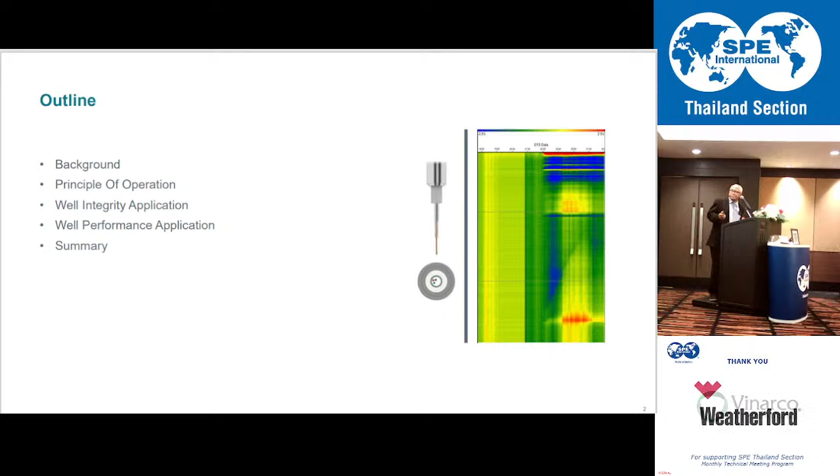When we look at where we work, we hope that we have this situation, but unfortunately not, because when we talk about oil and gas production, we never have the same as what we see at Niagara Falls. Why? Number one, the oil and gas is limited - the amount is limited and there is no recycle.

Number two, when we talk about oil and gas production, by nature it always declines. The third one, as you experience over time, the longer you have your field, the more difficult to produce, or the more expensive to produce at the same time. And the last one, the longer you operate your field, the more potential you encounter problems.

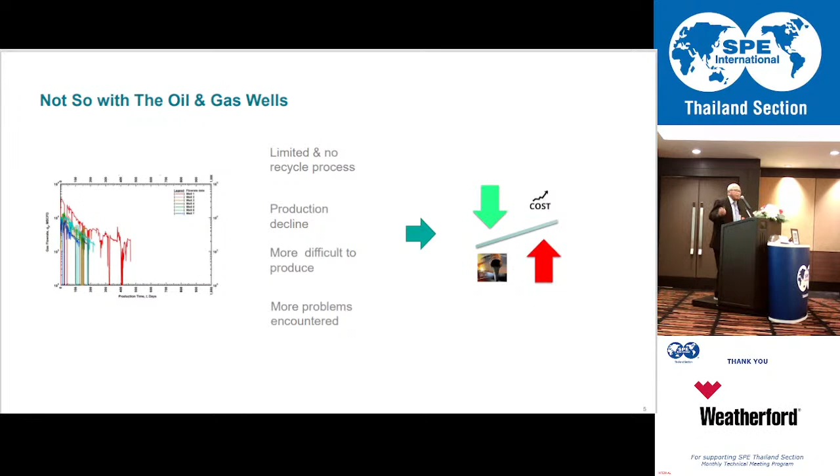But before talking about how the industry reacted, I would like to talk about where we are actually in the life of the well, from the beginning of exploration until when we abandon the well. Many SPE members - if I can divide it, we can divide the life of the well into two phases.

One is when we focus more on study and evaluation - I'm not sure with the audience here, but it looks like many of them are actually involved a lot on both sides. Whether you are focused on study and evaluation, or on the second phase of the life of the well, where we focus more on innovation and practical approaches to produce the well more efficiently.

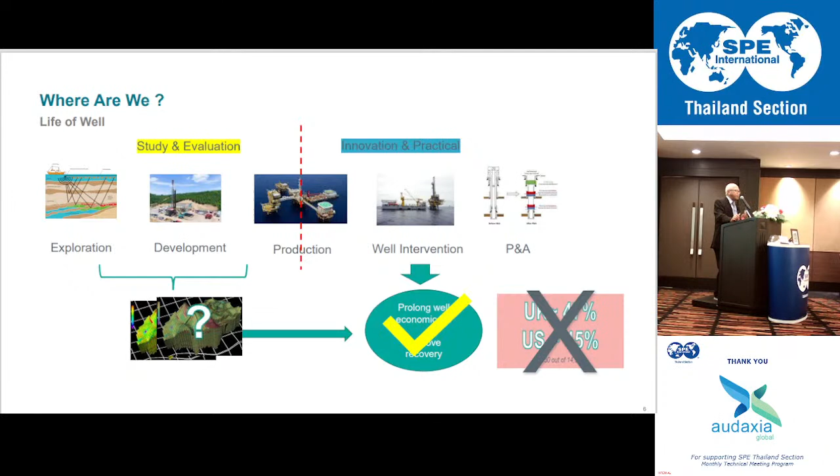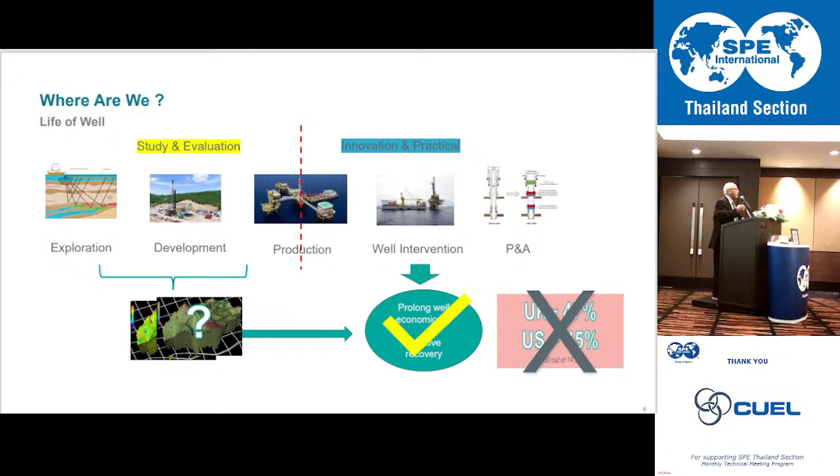From the study and evaluation, this is where the decision is made, whether from the exploration you have an economic enough reserve to develop, or you have to decide something different. And then when you decide to produce the wells, or when you do the characterization of the study and evaluation, the product is the reservoir characterization - it's like a blueprint for the rest of the life of your well, how you're going to produce, how much you're expecting to produce from your field, and so on.

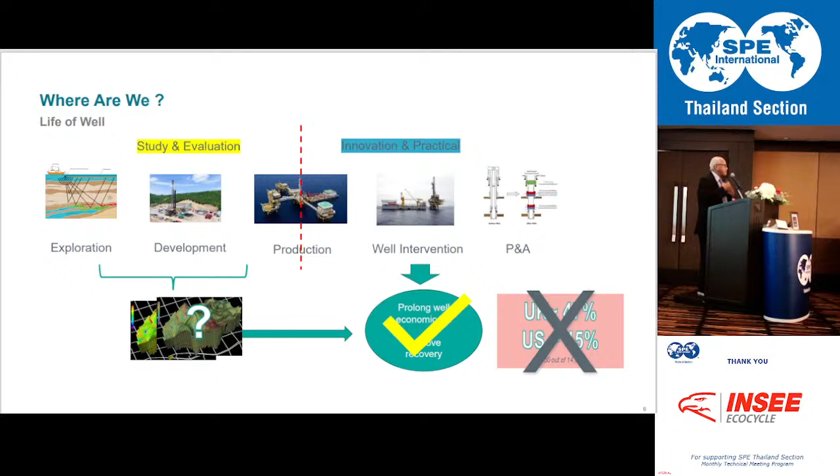After the production, what you have to focus on is to maintain or ensure that the well is still able to be produced economically. Number two, you try to get as much oil or gas recovered from your reservoir, which is to maximize your recovery factor.

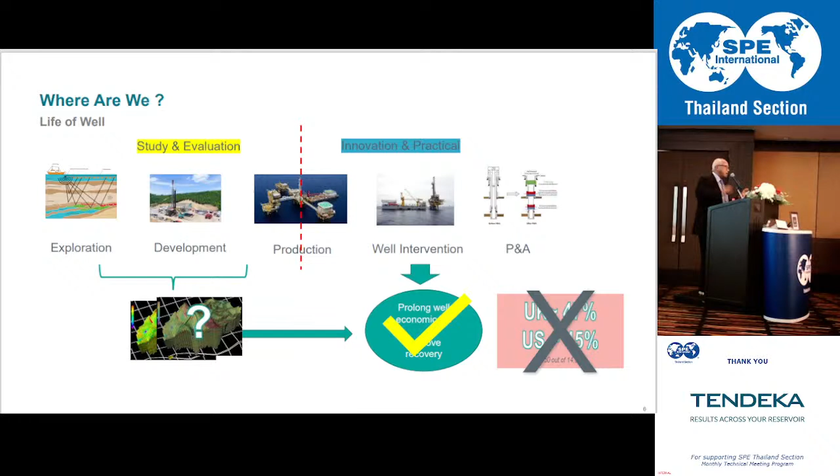What we need is, number one, your reservoir characterization has to be accurate. Number two, you have to maintain your well integrity, because there are two things needed to produce: one is you have oil in your reservoir, second, you have to have good well integrity in order to produce it.

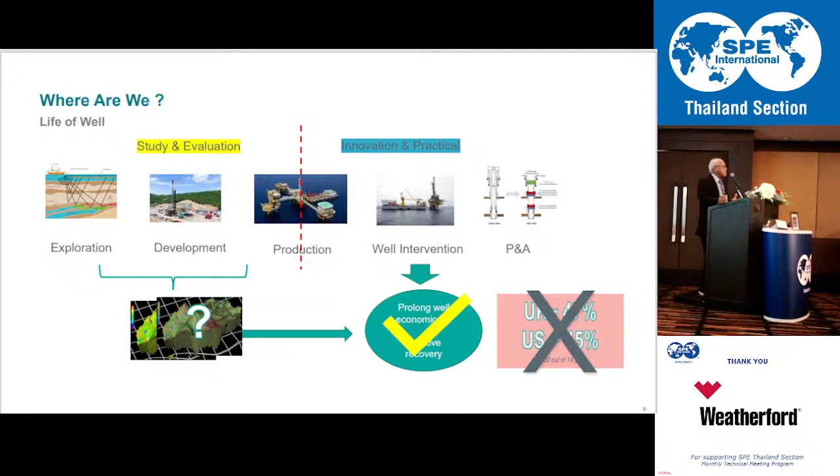The question now is whether this always happens. Of course not. Why? Because sometimes, even though you've spent so much time and effort on reservoir characterization, when you come to production, it's not always the same as your initial study. So you have uncertainty in predicting the performance of your field.

And the second one is one of the biggest challenges we have. Anybody can guess what this number is? In the UK, they mention about 47% of their live wells have issues with well integrity. Which means when you have this issue with well integrity, you will have issues with how to produce optimally, or maybe you cannot produce at all if the issue is too big to be handled.

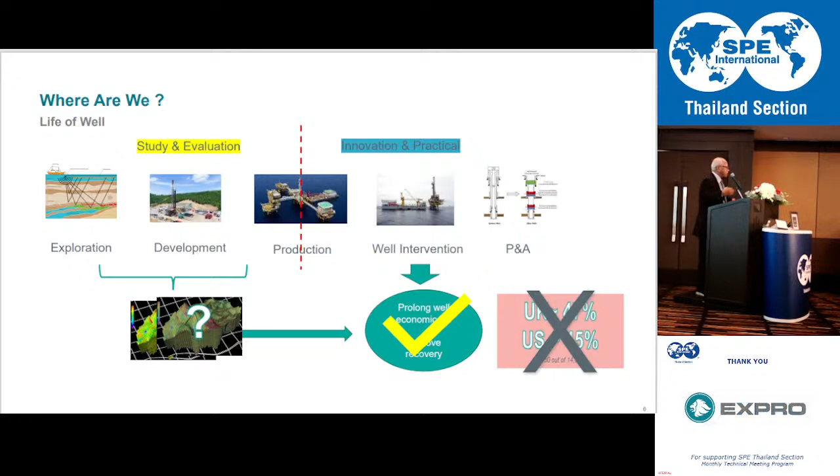The other one, which is more or less the same study or record they have in the US, in the Gulf of Mexico, about 45% of live wells have issues with sustained casing pressure. Some of them you can get away with and keep producing. Some of them you probably have to stop the production.

So what you have to do is two things. One, you have to make sure that you don't have uncertainty on your reservoir. The second, you have to address the well integrity issue, in order to keep your well producing economically, and maximize your reservoir recovery.

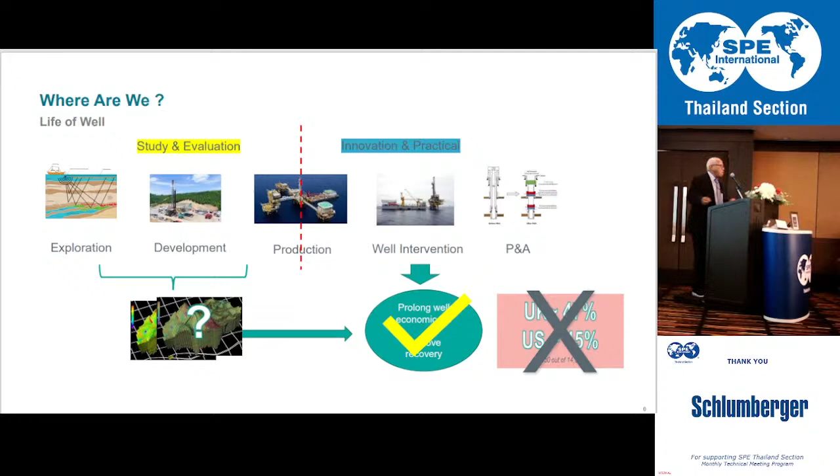Now, how does the industry react, or more specifically, how does the industry try to address this well integrity issue? When we talk about this, there are always two things, right? One is, the first question is what the problem is. The second is how we are going to address or handle this problem.

Because we have this pressure of gains getting less while cost is getting high, what we can do is try to manage the cost as effectively as possible. Do we have that? Yes, of course. The industry is reacting very well on addressing the problem of well integrity through several measures.

Number one, they are going smaller. Maybe when Ron or Rob started with the oil company, the way to address the well integrity problem was always to move the rig for intervention. Later on, they developed a more cost-effective way using coil tubing. And today, we have what we call coil hose, which is smaller in size. And in terms of mobilization and people involved in the operation, also smaller, which brings us to cost-effective operation. But of course, by going smaller, we have a limitation, right?

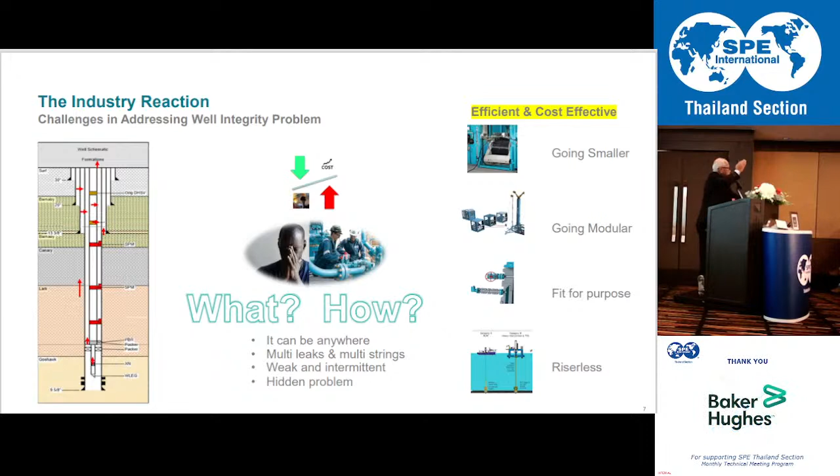We probably try to find it at the bottom of the well, but actually the problem is at the surface. By the time we reach the surface, the problem indication is no longer there. Which means we probably have to wait another day, another time, just to see section by section where the problem actually is.

Also, this is probably not seen as a problem, but actually has big potential to become one. What we call it is a hidden potential, a hidden problem. Hidden problem such as what?

Such as if you have high pressure gas, for example, with nearby shallow sand. If you have a leak, you will probably have a cross flow, charging the shallow sand with high pressure gas from the reservoir. Initially you did not see that as a problem, but when you drill a new well, or try to produce from somewhere near surface, you suddenly have a high pressure zone from that.

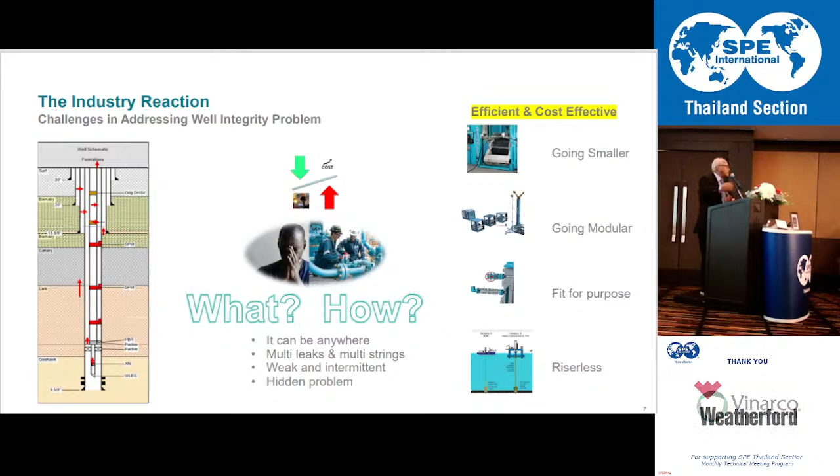So this kind of problem is one that you have to identify before you decide to mobilize your cost-effective means to address it. Or if you know it's not able to be handled with the equipment you have, then you probably go with other options. You have to mobilize the rig and provide a much more robust way of addressing your well problem.

Now, how do we come up with the correct answer on understanding what the problem is? So we need a capability to diagnose. Maybe many of you, when you were a kid, or maybe not, ever went to see the doctor because you were sick, for example. What you tell the doctor is, first, what your symptom is. So what does the doctor do after you tell them the symptoms?

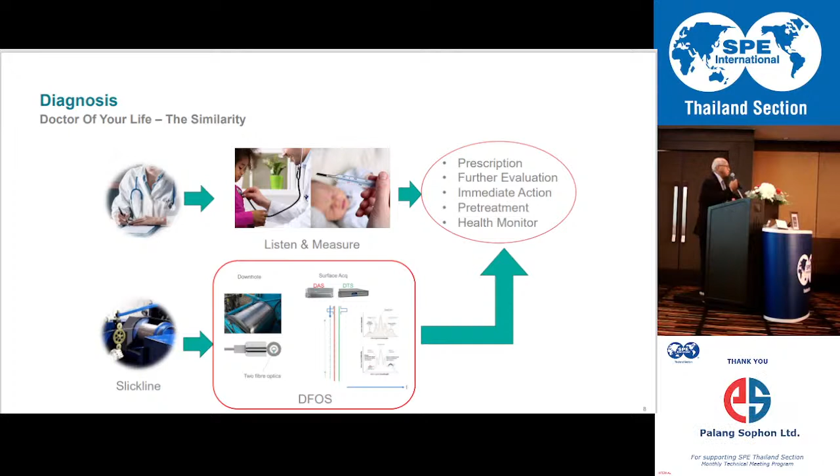That never ever changes is that the doctor always uses two things, at least. Number one is use the stethoscope to listen, and use the thermometer to measure your body temperature.

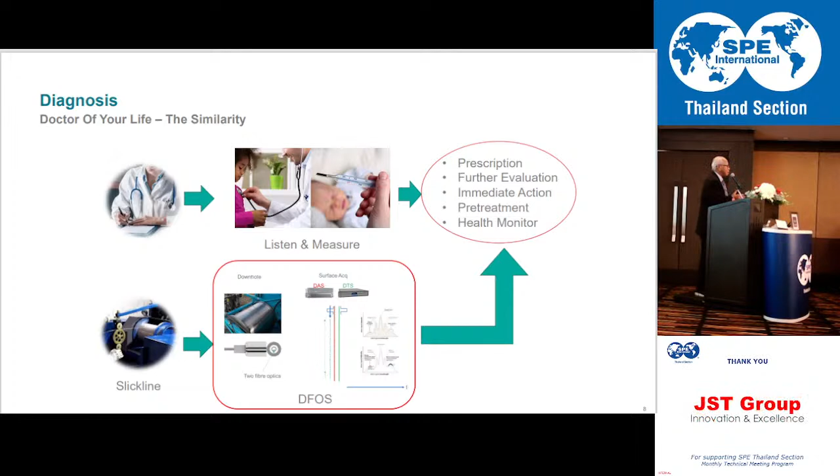From that, the doctor can come up with their diagnostic, whether you need prescription to address your body problem, or he will recommend you for further evaluation. If you think you probably have a more serious problem, you can address it with listen and measure, or you will probably be taken action immediately because the doctor sees you need that immediate action, or you probably want to go for other big operations - it can be a way of understanding whether you're ready to do the treatment or not.

And the last one, probably you are okay, you are healthy. It's just simply to monitor your condition time by time, so when something goes wrong with your body, at least you know as early as possible. Now, this is your body. What about the wells? When we talk about the well, what we normally have...

is a slick line. Of course, until today, we all know what the slick line is capable of. We know they are very useful in many of our operations, and in most cases they are always there from the beginning. But what the slick line lacks is that it's only limited to almost like mechanical work. Now, can we expand the capability of slick line? The answer is yes. By what?

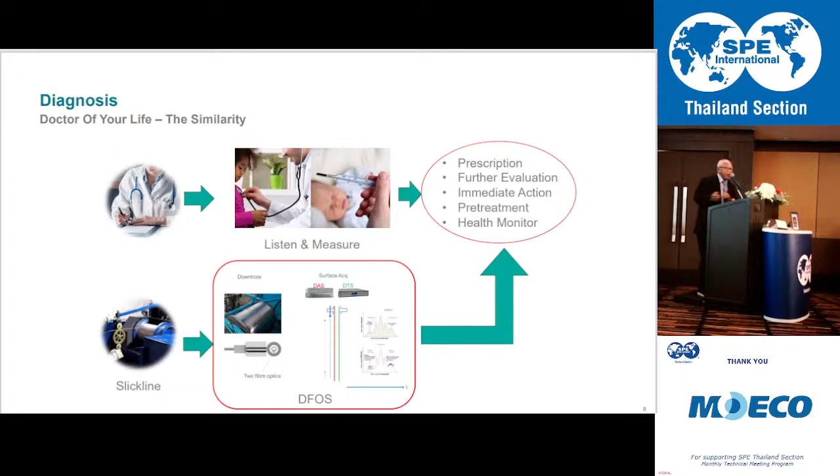By giving the slick line capability to listen and to measure, just like our doctor does to us. How are we doing it? This is what we call fiber optic sensing. So what we do with the slick line - normally the slick line is made by a solid steel wire. We can make the same wire, but it has hollow inside, and we put the fiber optic in it. So with this, now we can deploy the fiber optic in any wells where the slick line can.

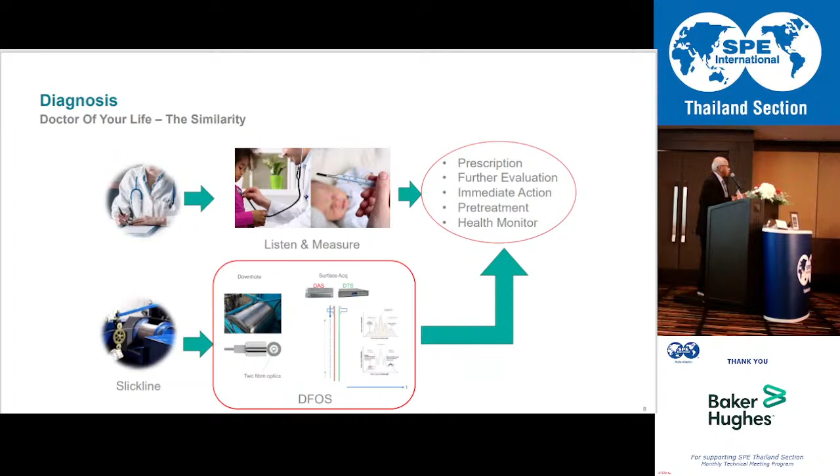So these are the things that I mentioned early on. Before, to get the fiber optics in your well was not easy. Why? Because in the beginning, what we do with this fiber optic is we always put a permanent installation. If you're not having it from the beginning, then that's it - you don't have it. Now, if you don't have it, and you see there is an application for it, you can just call the slick line and they can do it.

Now, what we do with the fiber optic and the slick line is two things. One is what we call the distributed acoustic sensing. The second one is the distributed temperature sensing, which is like I mentioned earlier, where the doctor needs to listen and to measure your body. Now, with the slick line, you also can do listening and measuring of your wells, the whole wells, not only one part, but the whole wells.

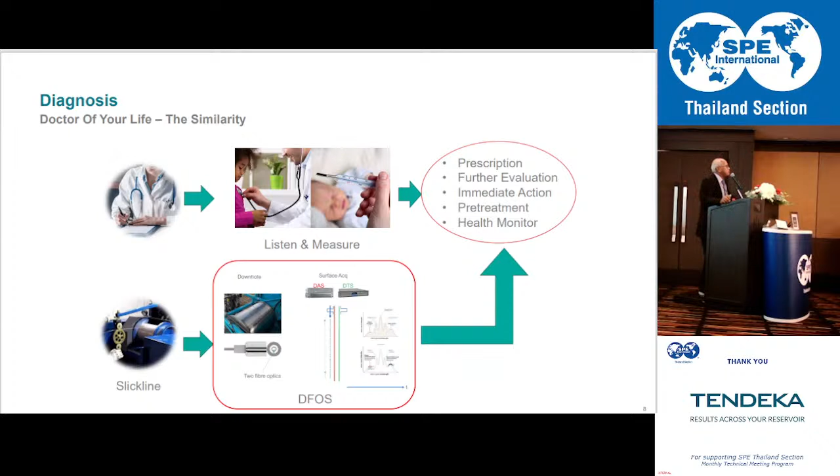So with this capability, if you have slick line with the fiber optic sensing, then you can utilize the slick line to get the prescription of your well problem, or to know whether you need further evaluation, or to know whether you are ready for the heavy intervention, or you probably simply just want to monitor your wells - how the performance is today, and in the next 6 months or the next 1 year, whether you see something you can do about it to improve your production or not, by continuous monitoring.

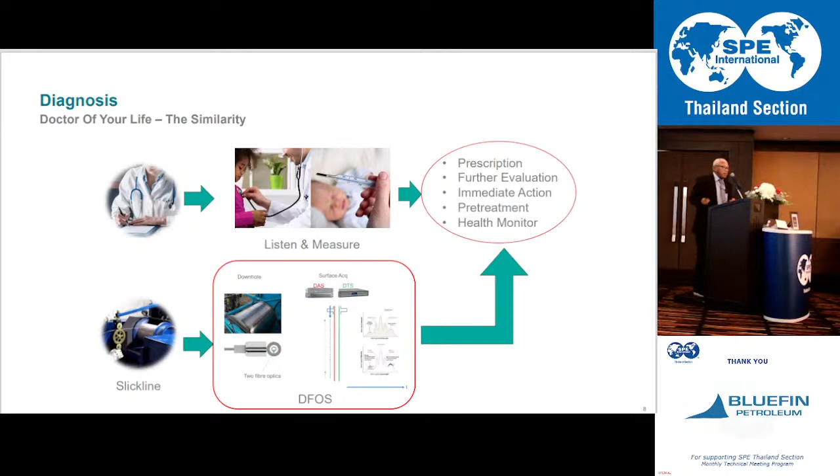Now I'd like to talk about the principle of operation. Okay, before I talk about this one, I'd like to mention a little bit about the technique of logging.

Probably every one of you are familiar. When we log wells, cased hole or open hole, what we do is we lower down the tool with the sensor on the tool to the target where we want to evaluate or measure, and then we move the cable along with the tool and the sensor at the same time and record whatever data we try to get.

So that requires time, and the sensor resides only in a particular tool. The fiber optic, when I mentioned it's quite revolutionary, is that the whole cable or the whole fiber optics actually we turn into a sensor. So what you see here is from the surface down to the bottom of the well, this fiber optic works as a sensor. The beauty about this technology is that when you talk about sensor, what you need is electronic and you need power.

Two things that normally can easily fail, right? Fiber optic sensing, you don't need that one downhole. You just send the sensor, which is your fiber optic, and there is no power, there is no electronics. Everything that we need as power and electronic is at surface.

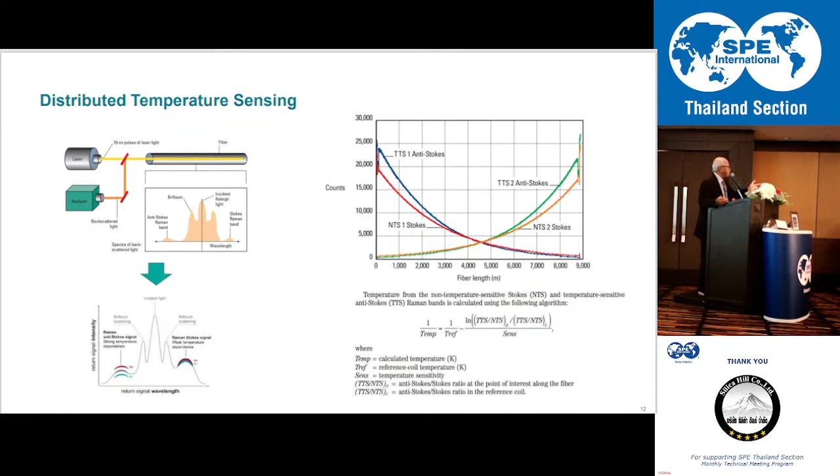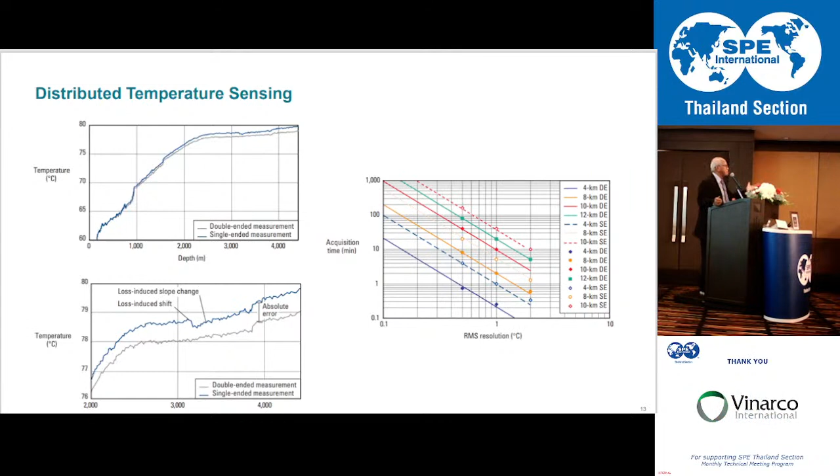The way we improve the accuracy or resolution is by how much data you record and average for that purpose. So if you record for 10 minutes, for example, with this double-ended setup, for a 4 kilometer well - which is average, probably less than this - you can get an accuracy of 0.1 degrees Celsius, which is good enough for many applications.

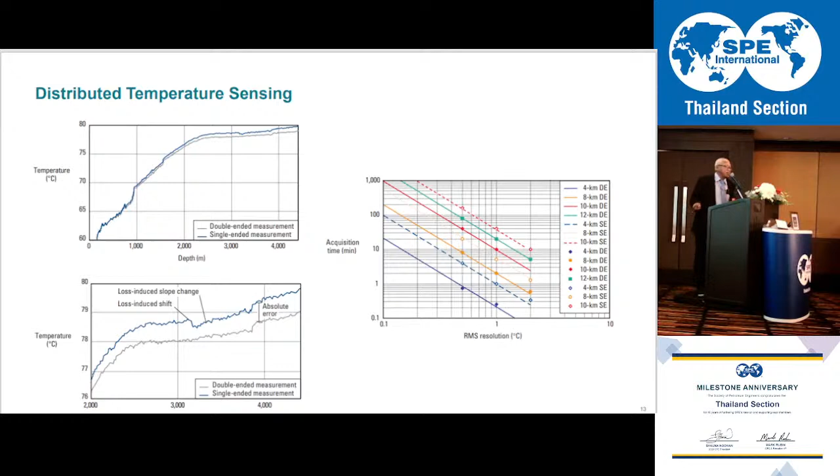So this is the actual data that we get from real measurement of the well. What we normally do is measure the data at one point, and in less than a second you get the whole measurement of the well, and you repeat - this is the first time here.

What we do normally is change the well condition depending on what the objective is. From there, we will know the changes when the condition of the well is being changed. So that's how we come up with analysis depending on our objective.

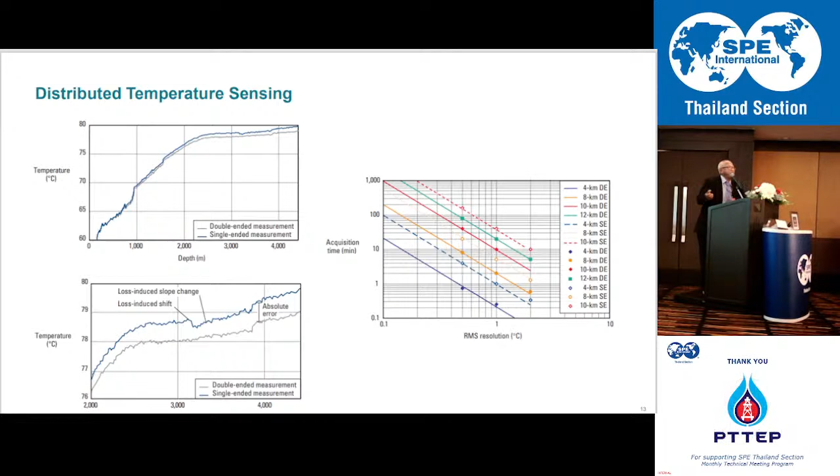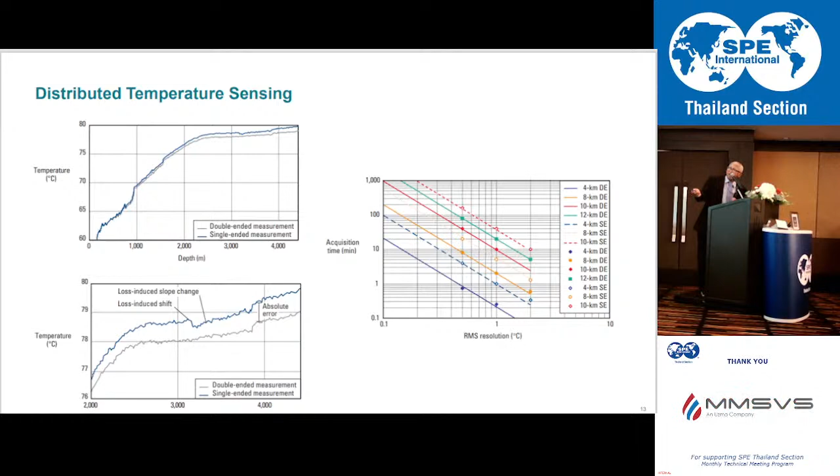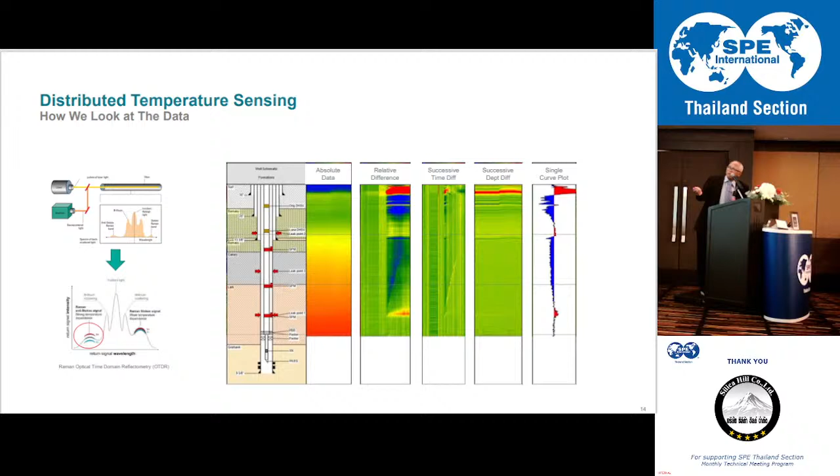You see here, like heating up. This blue is like cooling off. This is another cooling off, and this is another heating up, and so on. So basically, we use this different way of looking at the data to get a conclusion on what we are looking for. Many of us, like myself, because I used to work with the logging data single curve, I rather like to see how the single curve looks. So we can also extract at any depth how the response of the single curve looks, and then you can compare to other logging data measurements, for example PLT, or multi-caliper readings, and so on.

That's the distributed temperature sensing. Now, what's the second one? The second one is what we call distributed acoustic sensing, which is equal to listening for the doctor.

The way it works is similar. You send a pulse of light down to your fiber optic, the refracted light you record at surface, and your interest is on the Rayleigh peak. What we're looking at is the coherence between your original signal and what you receive back. What coherence means is whenever you have a vibration or noise at the depth where you have this reflection, it will give a shift on their peak. So by this, you will get the whole picture of your wells in terms of the noise.

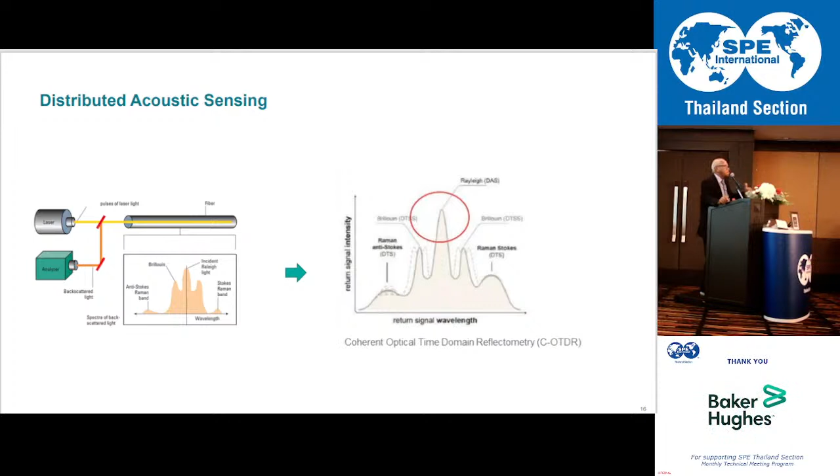Why is this important? Because, for example, if you want to know whether there is a leak or not, when there is a leak, what will we see? One, on the temperature, you must have a deflection, right? But everybody knows a well never has a straight line. It's always changing because of different formation, different heat conductivity of the well, and so on.

So we need to confirm that with the noise. Why? Because whenever there is a leak, in the case of addressing the well integrity problem, we want to see the temperature change and we want to see the noise at that particular depth. So this will be the key for the measurement.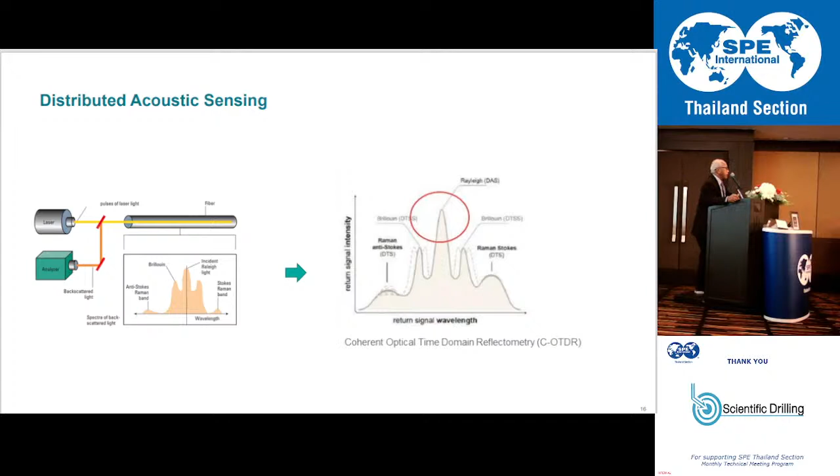So now what is the challenge here? If you talk about maybe 10, 20 years ago when people started looking at this data, the amount of data that we record is quite huge, like terabytes. I don't know, I never have a terabyte. Gigabytes already give problems on my handphone, right? A terabyte is 1,000 gigabytes.

I don't know, maybe Rob can share that, when you have this big data, normally people just put it somewhere on the cabinet. Nobody really looks at it because this is too big to handle.

Current development on this data handling allows us to have this data being handled in the field, and then within 6 hours we get something that we can interpret. How does it work? So basically from the giga or terabytes of data that we record from the wells, probably like one day we have about 2.5 to 3 terabytes.

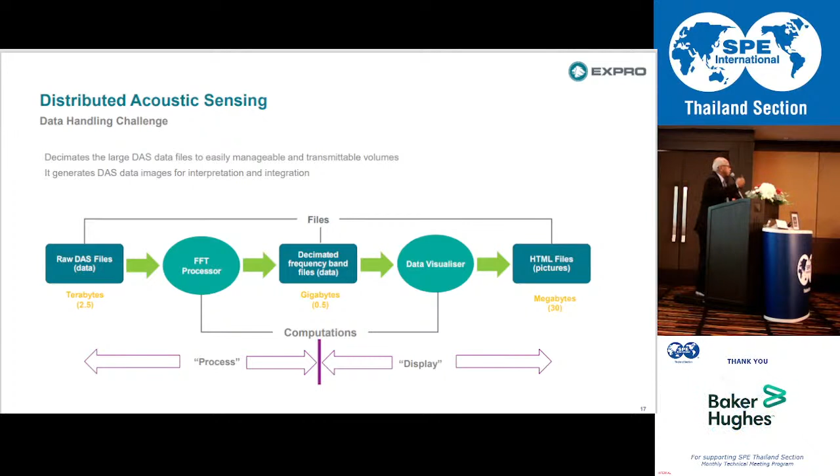We just pick up the one that is meaningful for our evaluation into somewhere like a gigabyte, which in many cases we could send to the interpretation center. Or if that's not possible, we could also generate a picture type of file, which is only megabytes, just like an internet type of picture. So we have two options here: either dealing with gigabyte data, less than 1 gigabyte, or dealing with megabytes of data where we get the HTML picture.

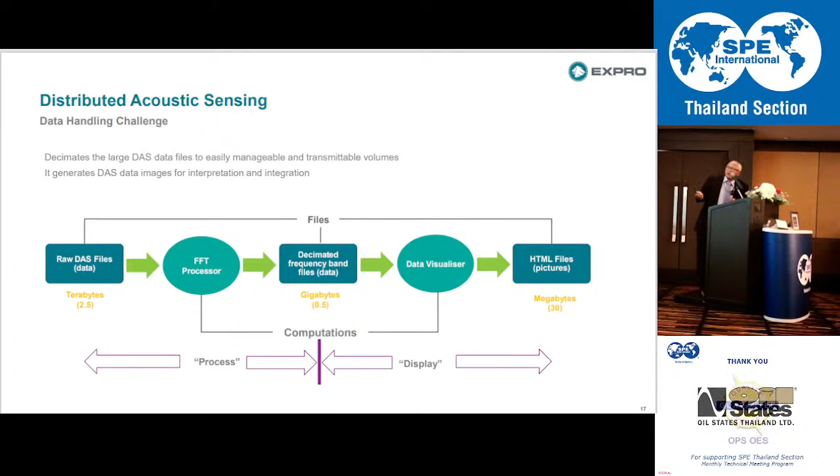So how do we get that? Basically when we talk about noise, what we record is capable of recording up to 10 kilohertz. And there are some ways of looking at different frequency for the interpretation. For example here, the same data, when you look at from 0 to 5 hertz, this is from top to bottom, this is time, and the blue one is when it's quiet, the red one is when it is noisy.

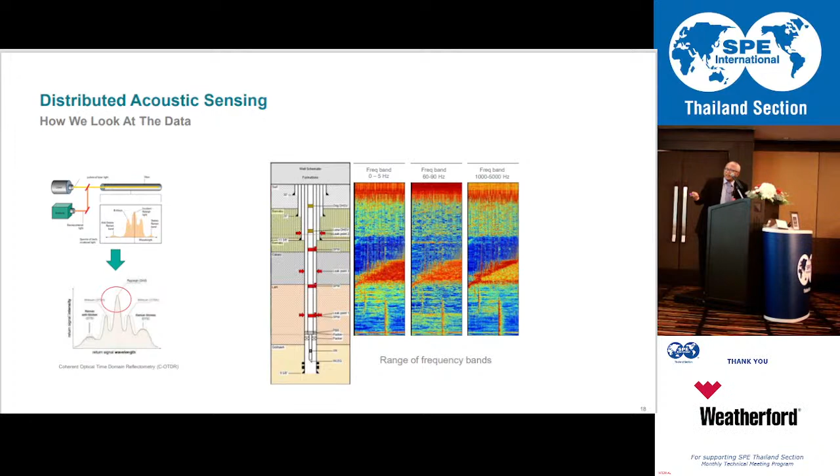So what we see here on the surface, you have a lot of noise, then less noise, then quiet, but you start seeing something here, and another noise here, and another here. When we look at different frequency, initially you do not see this, but you start picking up something, and on the higher frequency again you see a different picture. So looking at the data in different frequencies gives you the capability to evaluate what happened in the well.

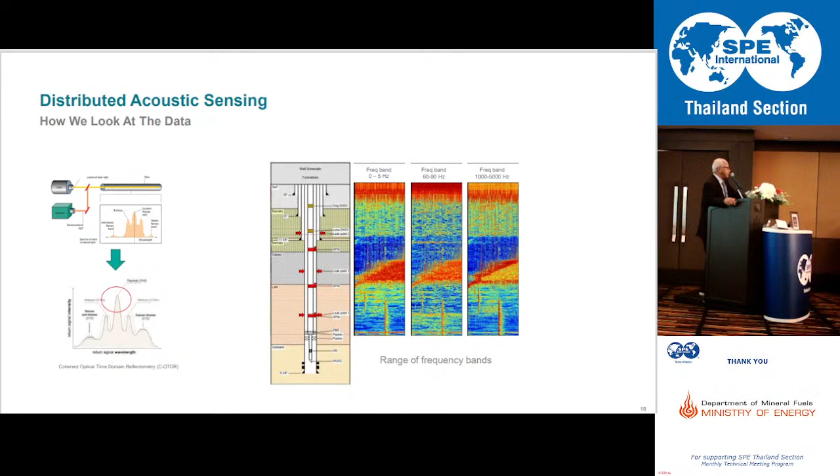Anybody who has been involved in analysis or evaluation, especially of a problem, never relies on one measurement, right? So what we normally use for this application, we try to gather as much information as possible and put it all together. Like for example, this one.

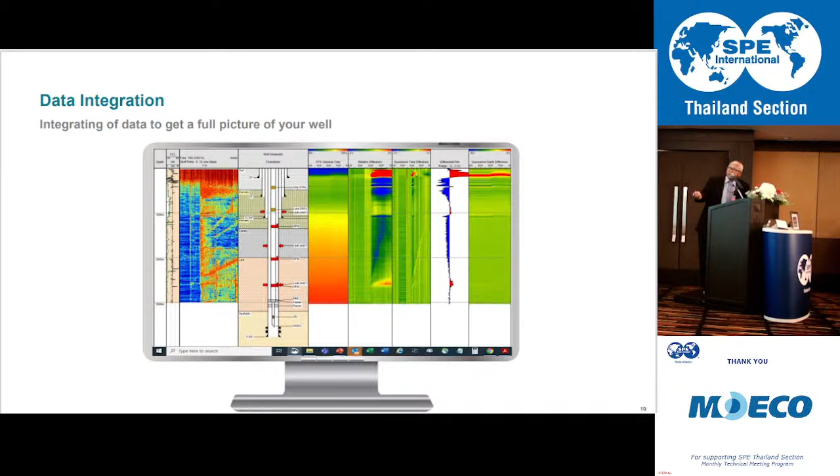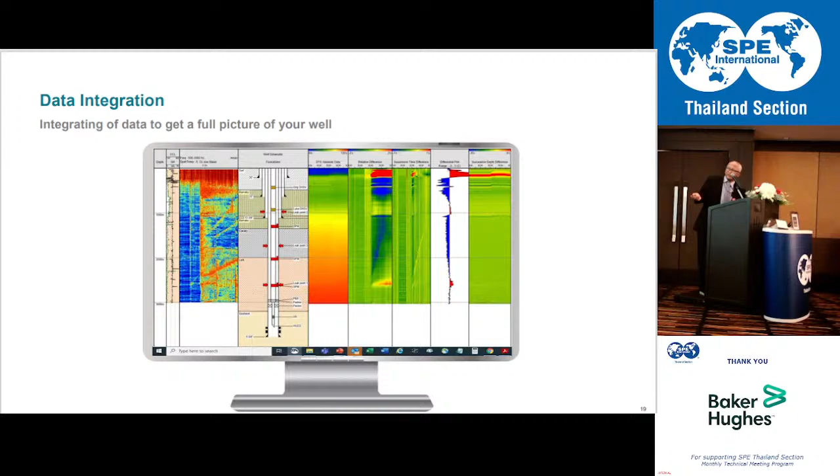We have acoustic sensing, we have temperature sensing with different ways of looking at it, as I mentioned before. You also need to know what the completion diagram is. You probably want to add some open hole data or single curve measurements, and layers of the well in terms of the formation. So all these things give you information that when put together, suddenly the response makes sense and you come up with a conclusion.

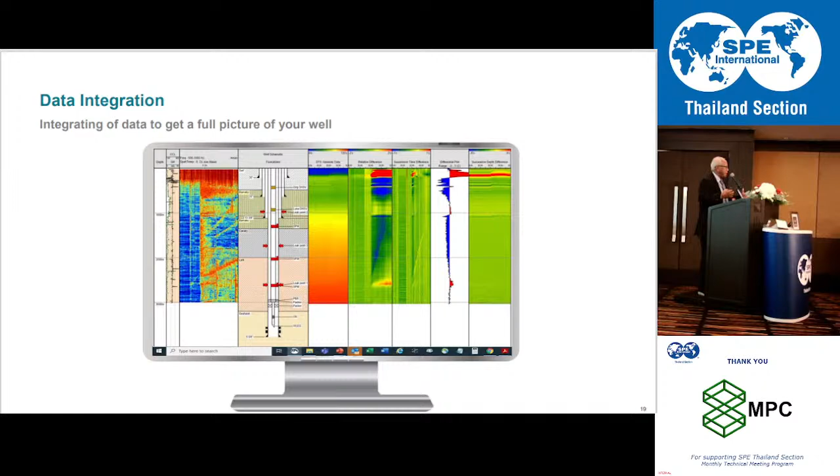So this is one of the things we recommend, or try to implement, whenever dealing with this: don't rely only on one measurement or two measurements. Get as much data as possible, and then start to read it, evaluate it, or analyze it.

Now I want to go on to the well integrity application, which, as I mentioned early on, is an area that has become quite a big challenge for well intervention, which ultimately extends the economic life of your well, or gives you more recovery from your reservoir or well.

So this is talking about wells where, when designed early on, they already planned that at one point they may need artificial lifting. So for this well, it was prepared to have gas lift at later stages of production. This well has been producing about 2,000 barrels per day.

And what happened is that suddenly they have pressure on the A annulus. Because the pressure is so high, they cannot continue with production, they have to stop it. It became urgent to address. So what they did...

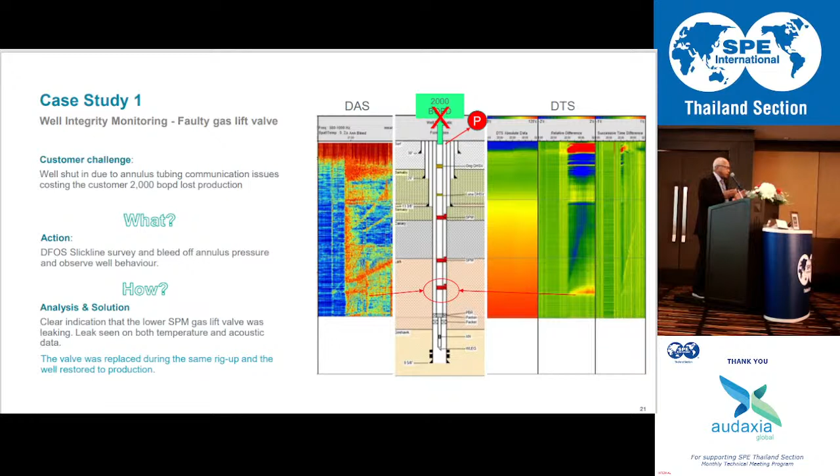They decided to do fiber optic sensing, or distributed fiber optic sensing, using slick line, because they don't have a permanently installed fiber optic here. To analyze this, they make two different conditions: for investigation or diagnosis work like this, we always try to change one condition to another. So what we do is record while the well and the annulus are shut in as a baseline, and later open up the annulus to let it flow, and observe what happens there.

So what we get is this: acoustic sensing, distributed acoustic sensing on the left, and temperature sensing on the right. You see here, this is when the well is shut in, and this is when the annulus is opened. So you start to see some noise here, and many different features here.

So this one is probably contact moving up, and something here, something here. So basically many of these features are related probably to the completion. This one related to this one, I don't know what. Probably fluid level, and this is an indication of flow going up, right?

And when we look at the temperature side, what we see is like this. So when shut in, nothing is happening. When we open up the annulus, this is like fluid moving down, a cooling effect, and at the same time hot liquid moving up.

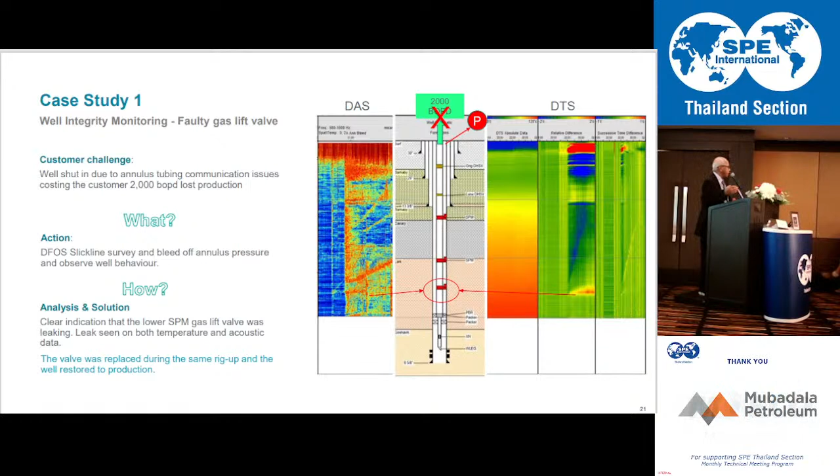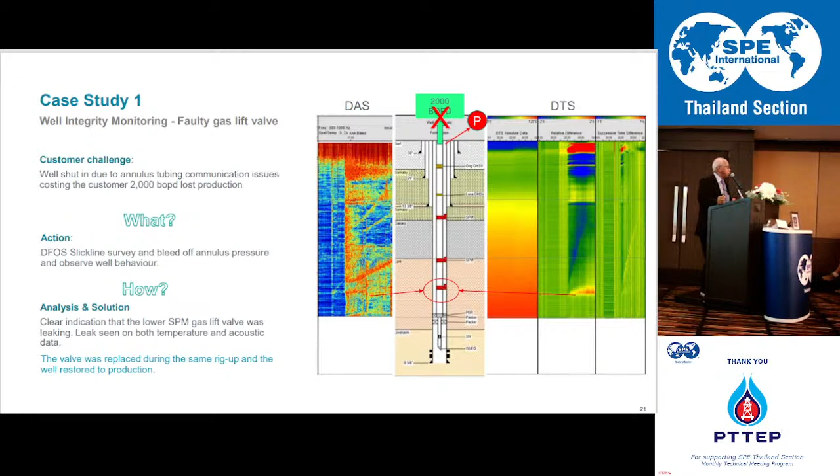From this one, what they see is that this particular gas lift mandrel we initially put with the blank part was leaking. So for this intervention, we simply use the slick line, change the valve, put it back, and flow the well back into production. This is a case where you really need to understand your well before you mobilize the rig or heavier equipment. Just by running the diagnostics, you can address your problem even with a slick line.

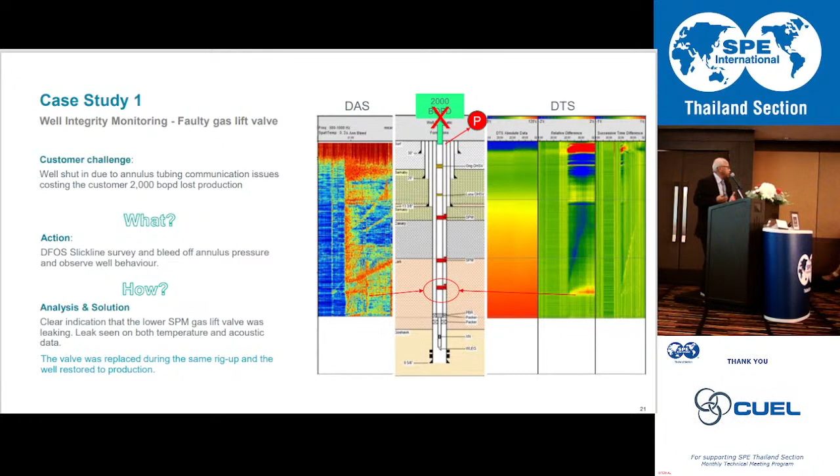This is another case, where in some economic or cheap wells, when you have the reservoir, you did not cement the production casing all the way up to surface. What they do normally is just cement it up to above the production zone.

They did only this because they did not think there was anything particularly dangerous that needed isolation. What happened then is they have pressure on their annulus. Of course, without cement, it can be from anywhere, but they suspect the cement here is not good. So the question is, really, from what depth, or where else, can be the source of your pressure on the annulus?

So they ran the fiber optic on slick line, went down, and then bled off. They also tried to see more than just a leak - they wanted to see how the well was behaving. After they bled off, they shut in, flowed the well, produced the well, and observed what happened.

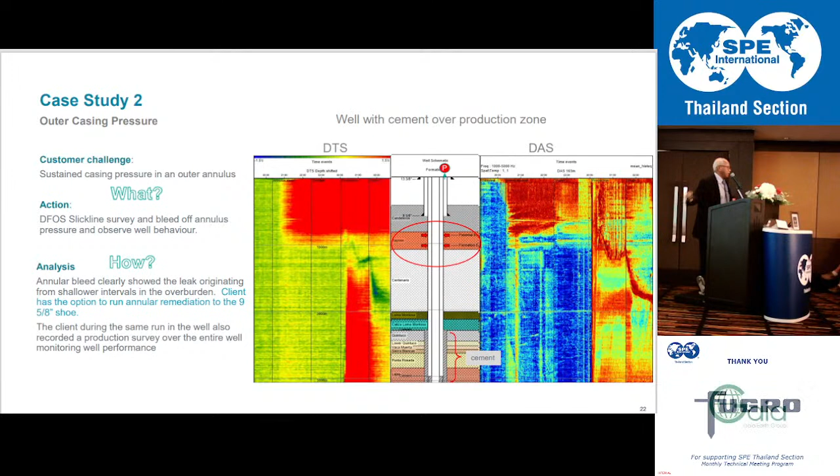With this one, what the client concludes is that they have to put a cement plug somewhere here. So it's not slick line work, and probably not coiled tubing work either, but you need a rig to address this problem. So you will not mobilize cheap equipment if it cannot solve the problem.

By understanding the problem with this well, you can come up with exactly what's needed. You don't just mobilize expensive equipment unnecessarily, or alternatively, you may realize you actually need more heavy equipment mobilization once you know what the problem is.

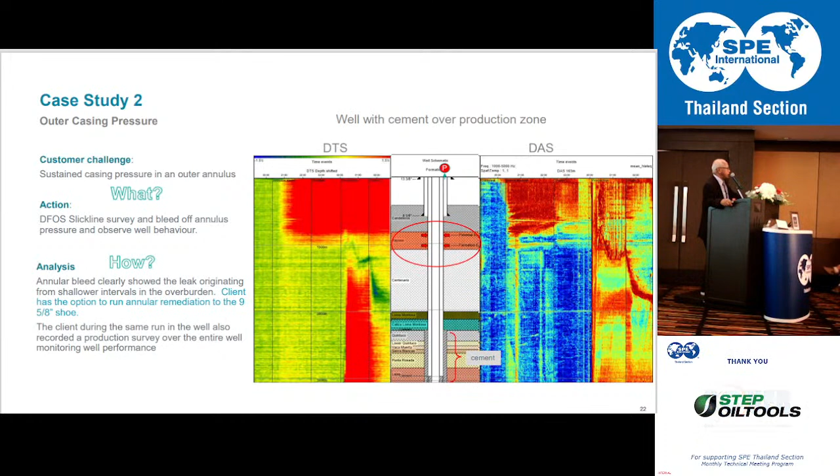Now, another application for fiber optic sensing is for well performance applications. But before I talk about that, I'd like to go through the magic of the temperature log. In my experience dealing with this data, one of the most important measurements I use is temperature. I'll go through how this gives you good information.

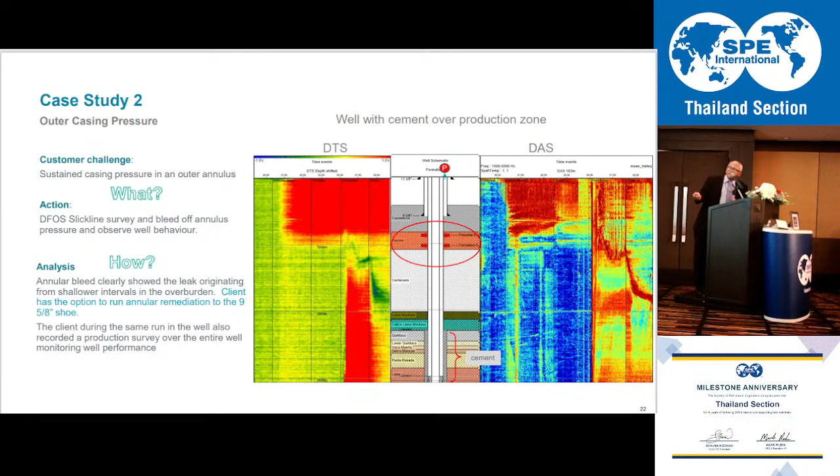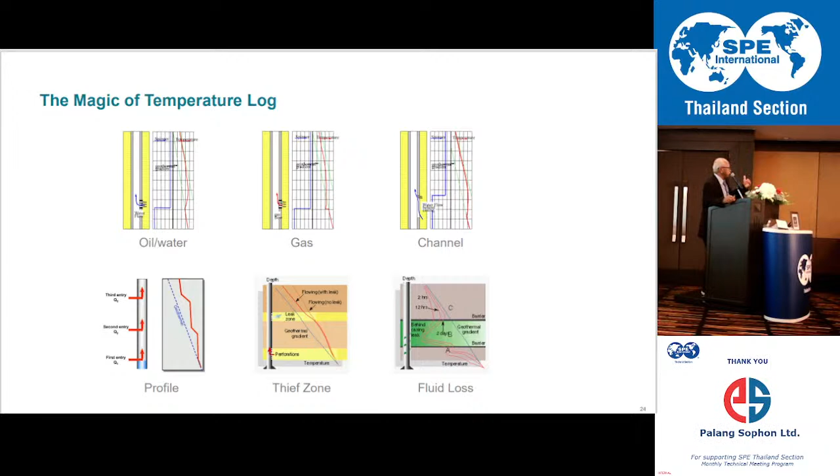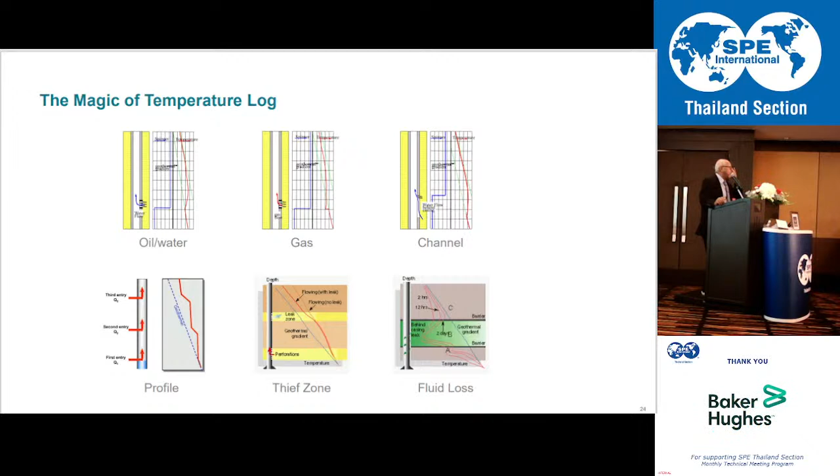What about if you think you produce, or your geologist convinces you that you have a gas or oil zone, but when you produce it's full of water? That's one, the answer can come from the temperature too. What you see here, the spinner gives you the normal response, but the temperature responds differently. Where you see the deviation is not in the place where you want to produce, but somewhere below it. So it is a channeling.

So information like that is very useful for the operator. Another one is for profile production. You can see a different profile like this, giving you information on which zone is contributing, which one is not, how big is the contribution, and so on.

And also this one, when you're dealing with the thief zone, you think you're producing okay, but why does production suddenly drop? You probably have one low pressure zone on top that you already squeezed, but halfway through production it breaks down and some of the liquid goes into that zone. You can observe this from the temperature response.

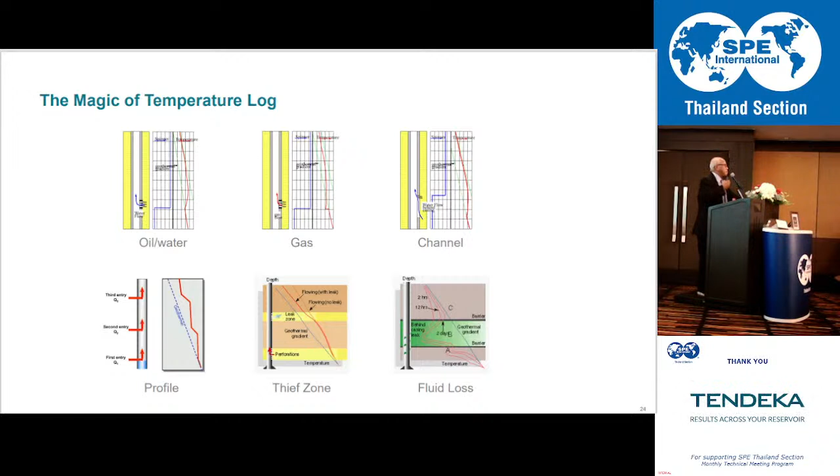Or in other applications you have the injection and then you want to observe where actually your loss of drilling fluid, for example, you want to know where the fluid goes. We can track back from the heating up of the zone which receives the fluid, normally going very cold and then slowly going up.

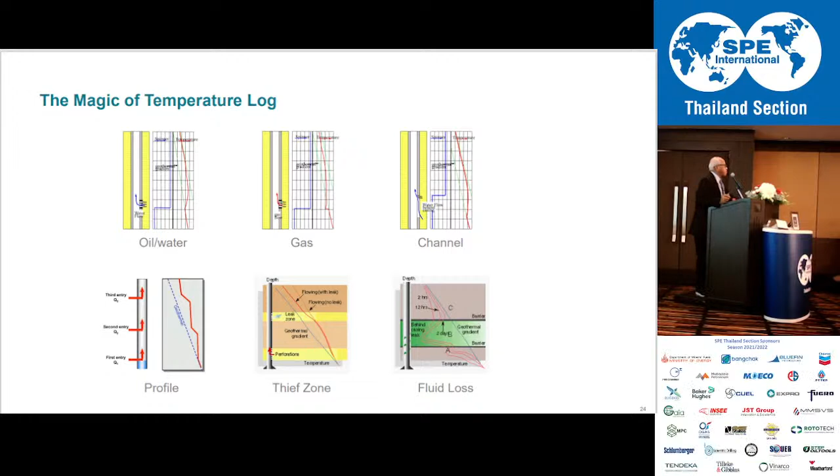Now this fiber optic sensing we can use for that part. It's not answering all what you want to know, but sometimes it just gives enough data for you to know.

So the way we do it, if we want to evaluate the profile or see the contribution, we use this fiber optic measurement. We get the slickline response. From this, we go with the thermal model simulation, and then from there we get what we call matching the production profile.

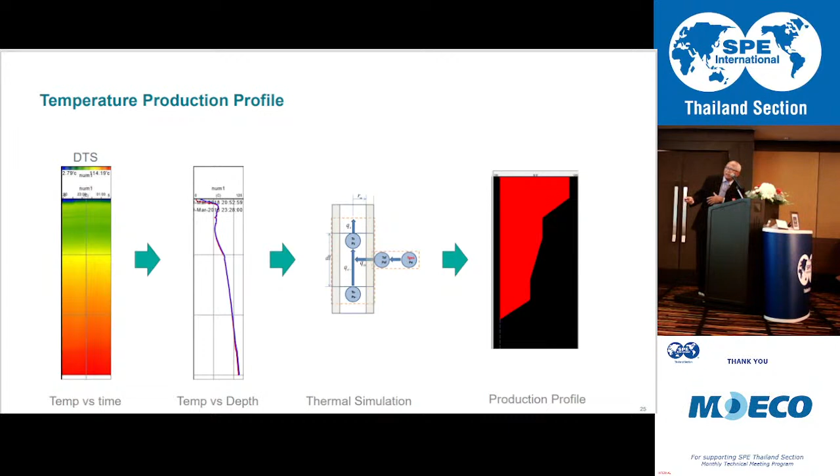I'm not good at mathematics, but I just want to mention the principle we use for this evaluation. Currently there are so many models we can use, but the most common one used is the steady state, with the assumption of a mass balance equation and energy balance equation. So basically, whatever you produce, mix, and then at the end has to be the same. So between low and high enthalpy, when you mix together, the total has to remain the same.

So that's where your temperature model comes up, and then you get what should be allocated for the rate at that particular zone in order for the temperature to match your measurement.

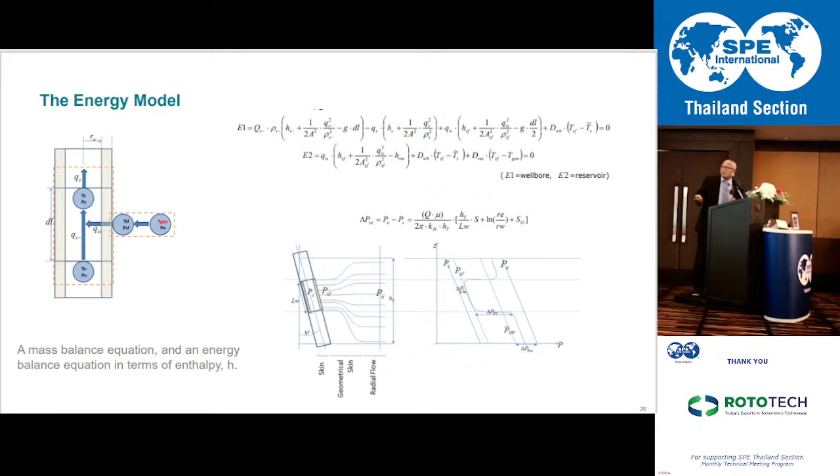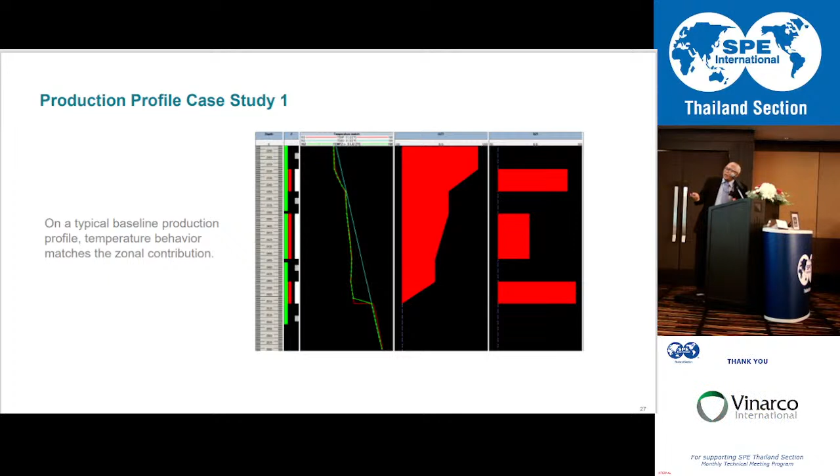You cannot see very well, but the red one is actually underneath the green one. The red one is the temperature we measure from the well, and the green one is the reconstruction of the temperature based on this contribution assumption. So when we manage to match the temperature to the actual measurement, we consider that the contribution is correct.

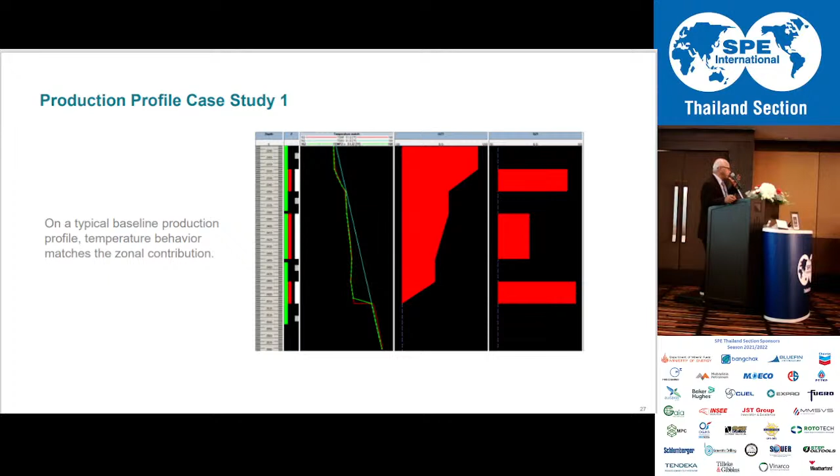One thing I would like to mention here, what we need to be aware of: in order for you to use temperature to generate the production profile, you need at least the pressure of the reservoir.

Because this one at least is not like the production profile we expect from the temperature. But we know this reservoir is low pressure and this one has high pressure. So what happens here is that because of the high pressure, different pressure drop, you tend to have more cooling effect here than here. And when you got here, you have less cooling effect, and at the same time, compared to this one, it provides high temperature. So what you see is not a cooling effect here, but more like a heating effect here.

So when we build the model, we put that into our calculation, and when we manage to match this, the blue one is the reconstruction, the red one is the actual measurement, and this gives the result like this.

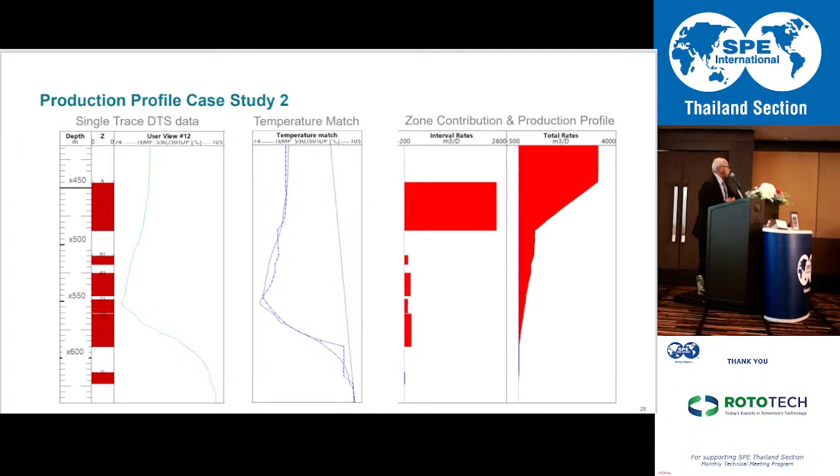So this is a few applications of fiber optic sensing, either for addressing problems with well integrity, or if we want to know the performance of your wells, identifying whether you have something that you can improve, cure, or plug off, things like that, using the temperature from the fiber optic sensing measurement.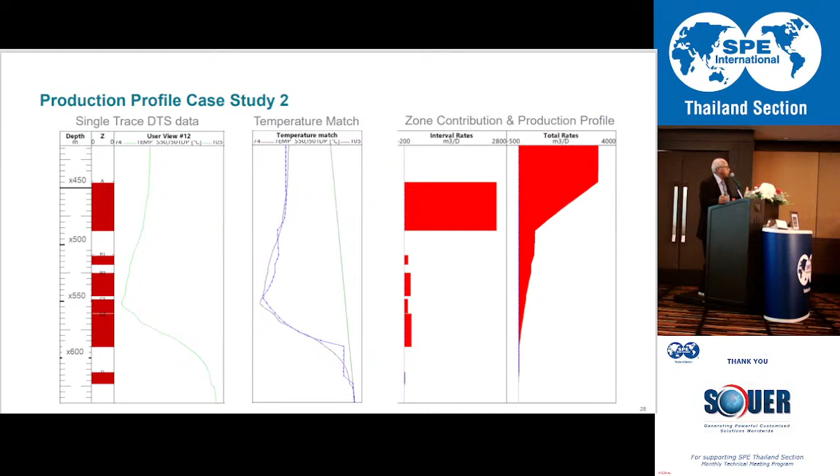Just to summarize what I've been talking about, the fiber optic sensing offers you the information to optimize your operation, in case you want to address your well problem or to optimize your well performance using the fiber optic information. Why is this becoming important today?

Number one, now you have the opportunity to use fiber optic in many different ways. You can use it on coiled tubing, on E-line, on slick line, or there is also a disposable fiber optic. You drop it in the well and leave it there, wait six months before you do the intervention, just to make sure the cable is not obstructing your production. Or, like in the old days, if you're rich enough to have the well and spend the money, you can put the fiber optic installed permanently.

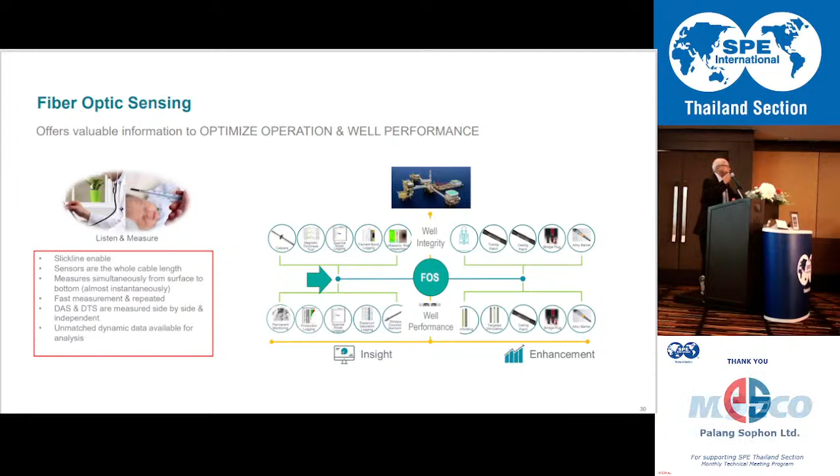But that luxury information may not be available for you, though the problem you may have is the same. So now you can use, say for example, slick line, just converted to the fiber optic sensing.

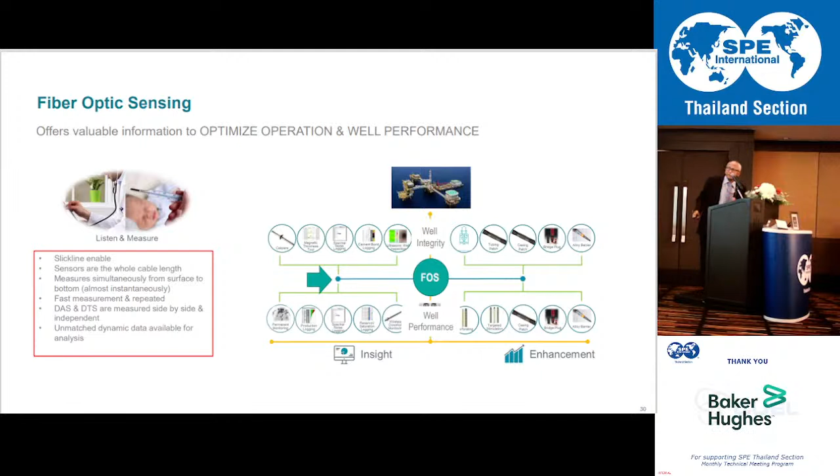The beauty about this technology is that you turn the whole fiber optic into a sensor. Basically, you run the hole and you get all the measurement, you will not miss anything. You can measure this in a second, instantaneously, from the top to the bottom, and you can repeat as many times as you want.

Also important is that with the ability to handle big data, now you can use both the acoustic sensing and the temperature sensing at the same time to understand your well performance or your well problem. And more importantly, now you have a dynamic picture of your well recorded with this.

In the past, what we could do is just record a single line. Now you can record over time and see how the fluid level is moving, or whether there is a change in the contribution, and so on.

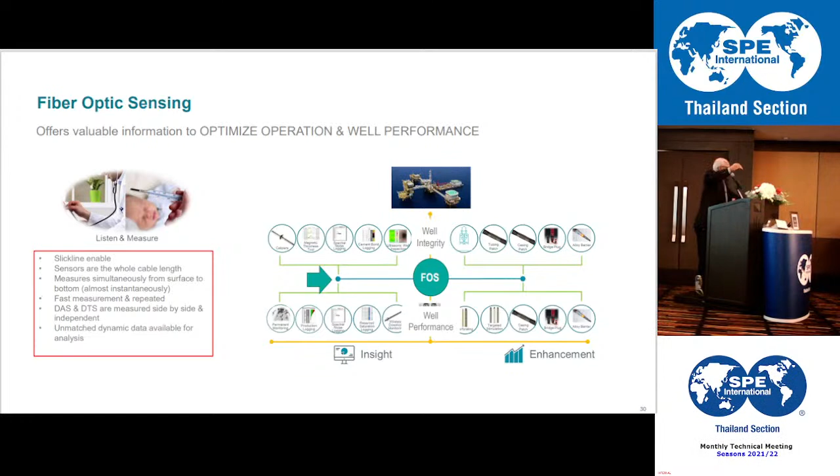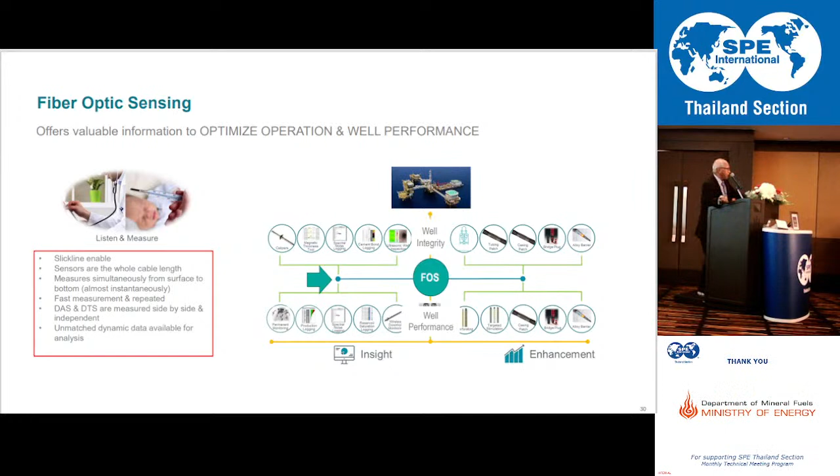With this, I conclude my presentation, and thank you for your attention.

Quiet, no more drinking. Any question from the floor?

With this, you say you run your fiber optic line all the way into the well, and you use the whole line. But for the temperature, what I still remember from your pictures, you have a sensor, right? And that sensor is the end point. Not? No, but... I'm trying to learn here, don't get me wrong. So you've got your sensor at the bottom according to your setup, and then what do you have?

A couple thousand feet of cable, and then you're going to ask, what's your temperature? Okay, so my question is, how do you do that? Let me go back to the animation here.

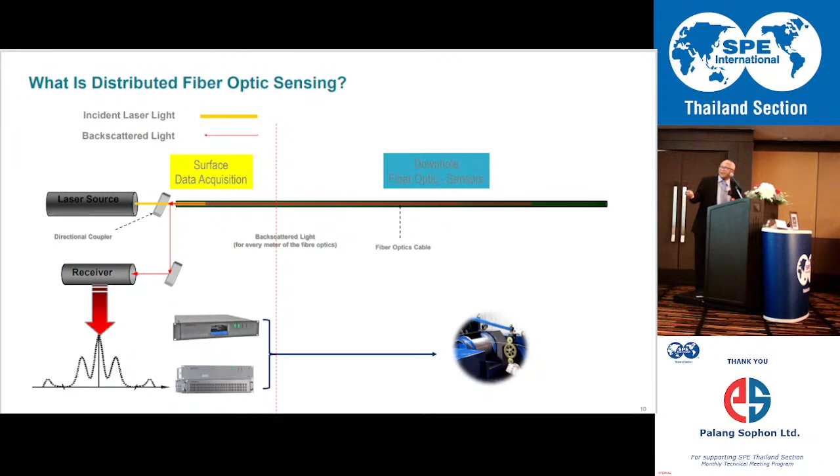When we pass one light like this, it reflects a light. When we pass another light, it reflects a light. So this is the one we convert to temperature. Agreed, I agree, because it's reflecting the light. So from the company, your company bought this a long time ago, and they said just wrap some fiber optic around the pipe, and I've got an algorithm that'll tell you the mass balance that goes through it.

2008. And then I don't know, maybe I wasn't born yet.

No, probably I was still a field engineer. I don't think about this anymore. Same here. Yeah, I was looking forward to say, all right, how's it working now? Which algorithm are you using now? No, I mean, in terms of the technique, it's the same.

The principle is exactly the same. We send a pulse, right? So the way we send the pulse depends on what spatial resolution you expect, or vertical resolution, wide or narrow, right? And then there's a cost of playing around with this. So we send the pulse, bang, one pulse, right? You get a backscattered light representing the whole length of the fiber optic, and then we chop it off.

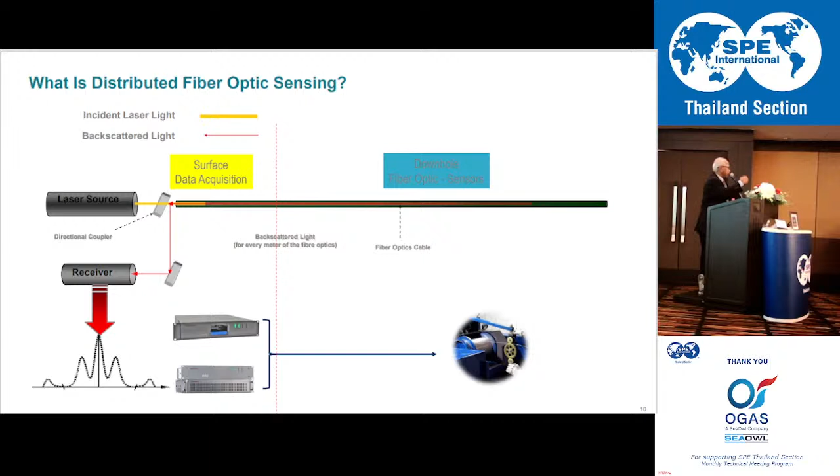Okay, let me check my understanding. Your fiber optic you can run along the well and measure every reservoir at the same time, because it's fiber optic. But with memory PLT you need to measure every sand at a single point and pull it up. So in a very dynamic well, the well condition might change very fast, so memory PLT may not fit for that purpose. That's correct. But fiber optic maybe can answer the problem. Yeah, I agree with you. Thank you. Thank you.

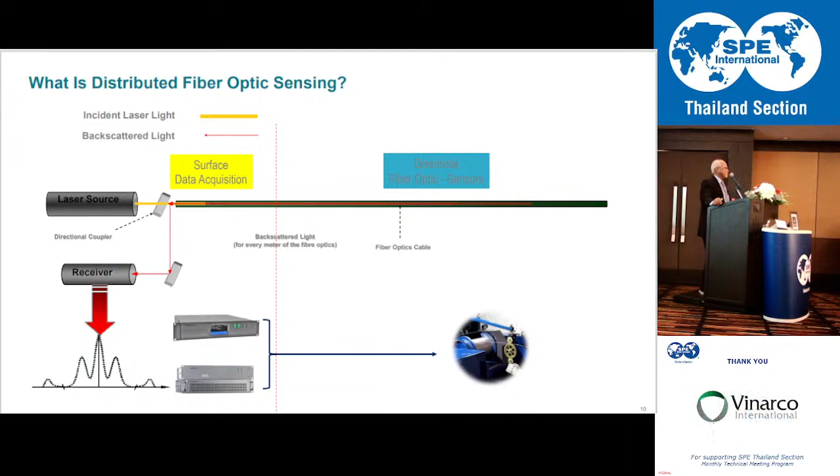With the luxury of time, can I have one more question, please? Last question from the back. Anyone?

Counting 1, 2, 3. So, okay, that's it for tonight. Thank you very much, Pak Riko. Thank you, brother, terima kasih banyak. Actually I'm quite relieved because before the presentation somebody would ask a difficult question, but I think you decided not to ask, so it's good.

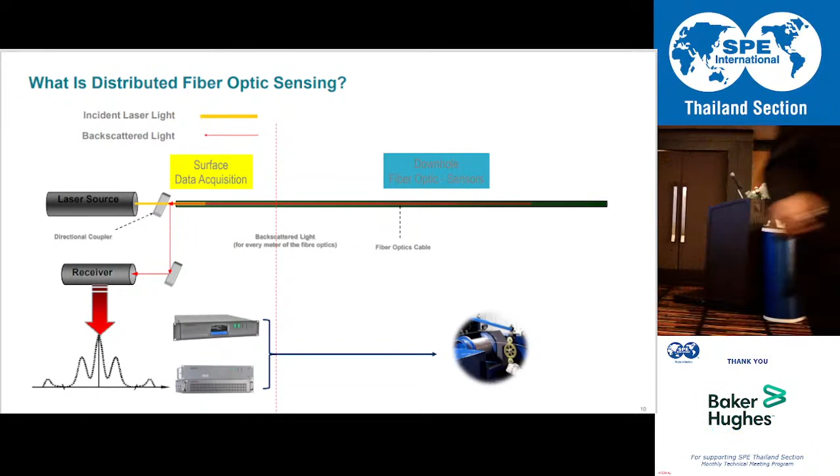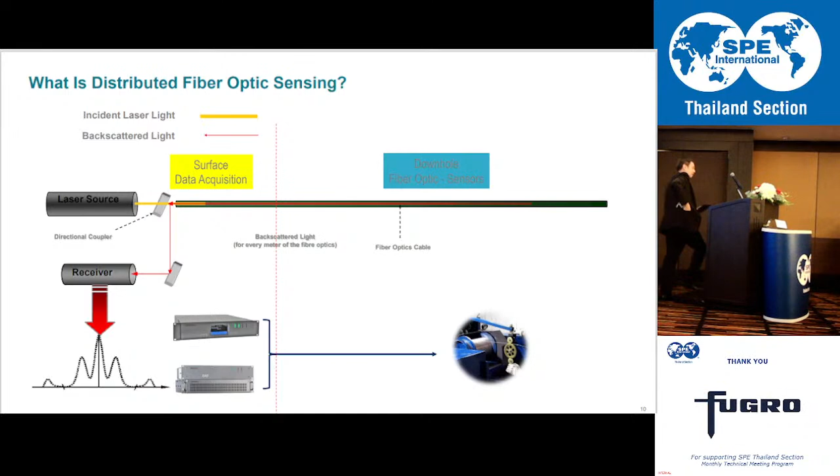All right, let's continue with the rest. For the upcoming meeting on August 18th, we have the SPE monthly technical meeting on the topic how making a shift in production mindset can transform production results, by Kun Kelon Diaz, Global Production Solution Director from Baker Hughes.

And of course, last but not least, on Wednesday is a special event. In October we're going to have SPE Thailand season opening, together with the SPE Thailand E&P Award presentation on 2021 and 2020 announcements. We'll have a talk from Kun Montri, CEO from PTTEP, on the topic the next chapter of Thailand Upstream. In the same event, we will announce the winner of the E&P Award project as well. So please stay tuned for that.

In August we have an upcoming event, IADC SPE Asia Pacific Drilling Technology Conference and exhibition in Bangkok, so you can check out the website and join this event as well. And of course the big event in 2023, IPTC, International Petroleum Technology Conference, hosted by PTTEP in Bangkok, 1st to 3rd of March 2023.